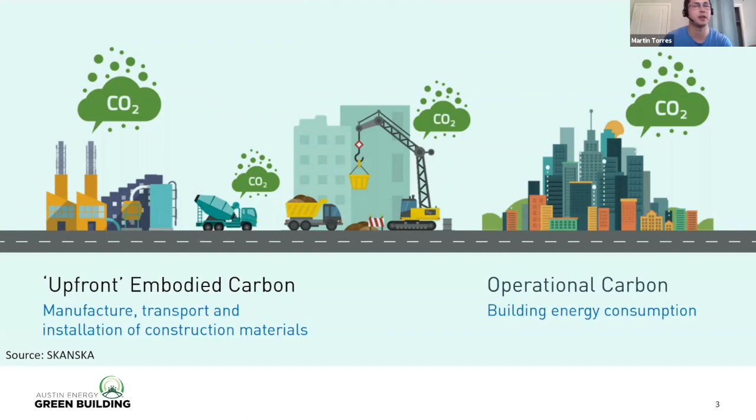I'm sure a lot of people here have seen this graphic, but very quickly, embodied carbon is the upfront carbon that's associated with building materials, as opposed to operational carbon that you see over the whole building lifespan, which could be 60 years, but it's all the energy use rather than the materials up front. And the important difference is the upfront emissions all happen before the door opens, and the operational emissions happen over the building's lifespan.

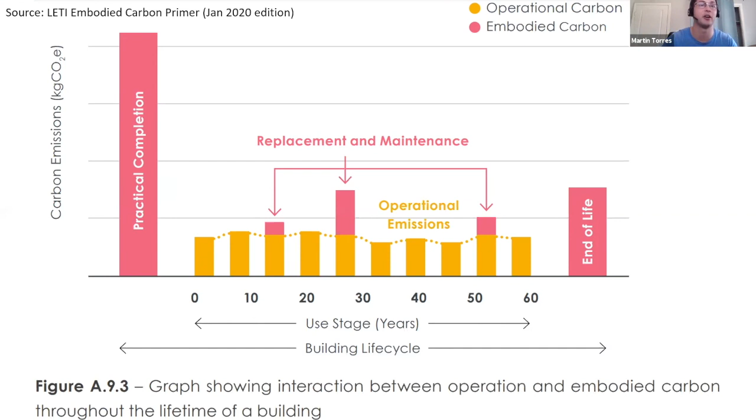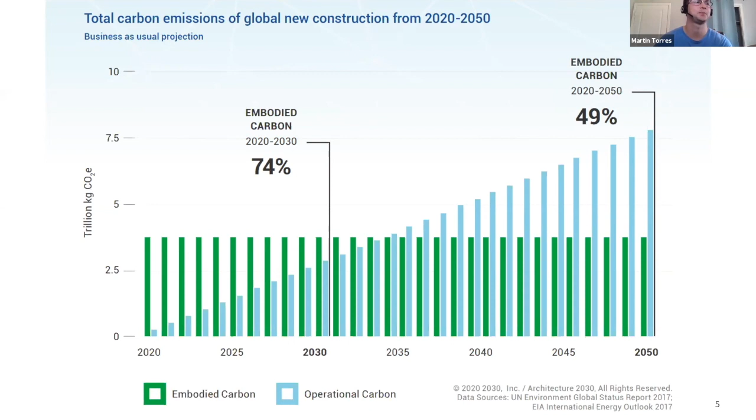And I'm not saying operational carbon isn't important. Improving those efficiencies is really vital. Refurbishing is really important, but this embodied carbon needs our attention too. I talk kind of ubiquitously about embodied carbon, but it's not just the carbon. Global warming potential, CO2 emissions, is really important. That's what's driving climate change, but there are other environmental impacts as well.

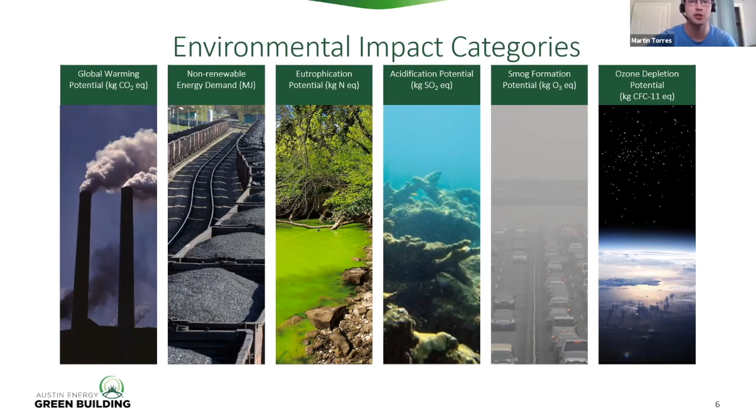So when I say embodied carbon, that is what I'm talking about, but there are all these other impacts happening as well: non-renewable energy demand, eutrophication potential, acidification potential, smog formation. Ozone depletion is sort of getting phased out. Buildings aren't shown to have a huge contribution to that, but it's still something that's tracked traditionally in LCAs and EPDs and whatnot.

So all components of a building are not created equal when it comes to embodied carbon. If I'm eating 40 cheeseburgers a week, the first step in my diet plan should not be to measure the oil and vinegar that I'm putting on my side salad. It should be cut out the cheeseburgers, right? So when it comes to embodied carbon reduction, let's focus on the big picture first. So much of it is coming from the structure, so a lot of the reduction strategies are focused on structural material, and that's the reason. We want to proportion our efforts to the outcome.

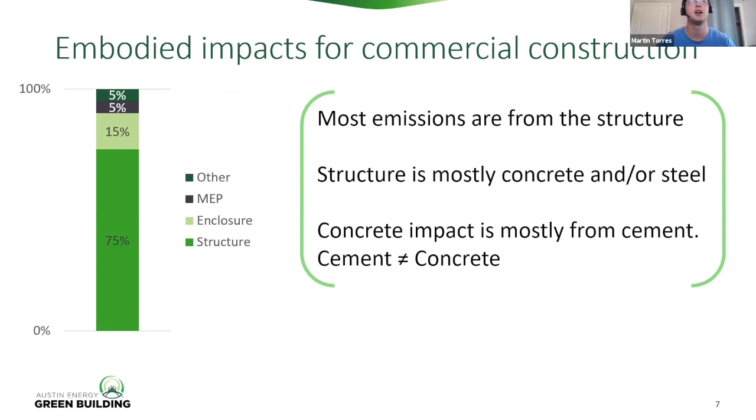And when we think about sort of the global importance of why embodied carbon, we're building a whole lot. And I mean, one of the best strategies to reduce embodied carbon is just using an existing building. The reason for that being you've already spent that carbon, it's already up in the atmosphere, so might as well take advantage of it.

But we're building a whole lot. And in the US, we might be able to reuse buildings, but with a lot of urbanization and especially in the global South, they're gonna have to build a lot. And what I wanna emphasize here is just this is a global problem and it's gonna require global solutions.

And so a lot of our reduction strategies, like let's share our best practices, let's create a community around this. That's where, and I'll talk about this later, something like the Carbon Leadership Forum steps in to share these best practices so we can have this community of understanding how we can respond. It's not just one person that wins the race. It's got to be all of us crossing the finish line.

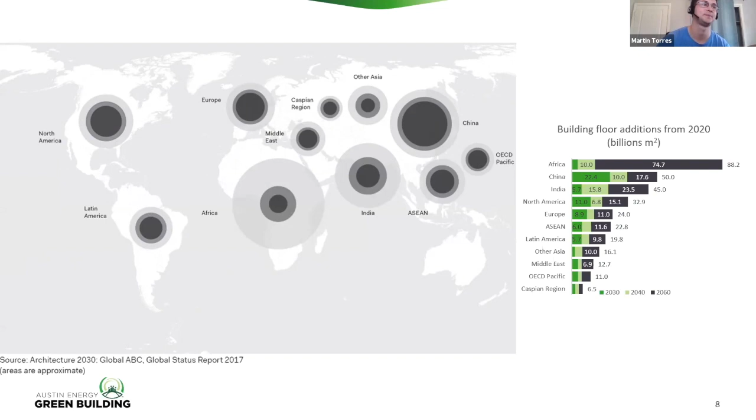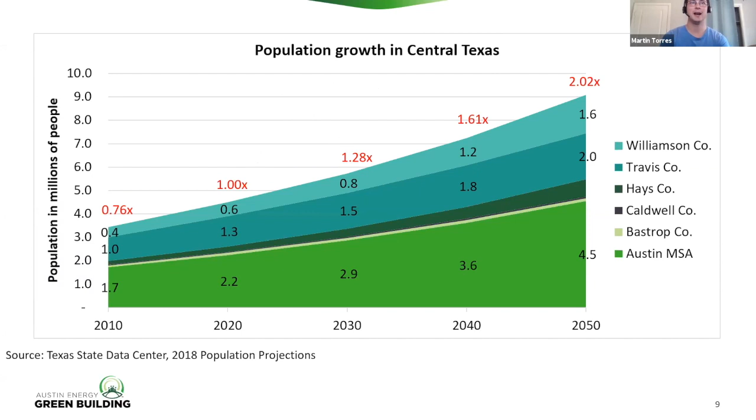And even here in Austin, I'm sure this comes as no surprise to anybody, but Austin and Central Texas is growing a whole lot. A lot of people are moving here, and that's going to take a lot of new construction. So this is a very pressing issue globally, but also locally.

So even outside the building industry, the way these materials are getting used is really widely impactful. So if we can make changes to update these supply chains and improve the process and improve tracking information, it's going to have implications beyond just the building industry, which I think is really important to understand.

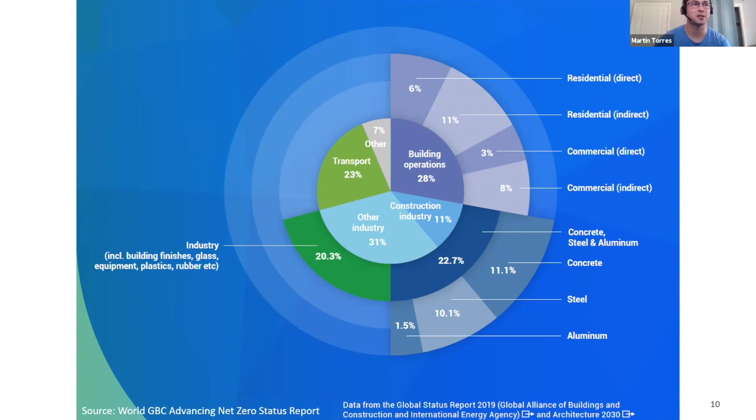But there are 1.5 million issues that we could be dealing with. There are so many things happening in the building industry. So why embodied carbon? I want to offer a thought framework that I find really valuable. And that's that the most pressing problems are big, neglected, and solvable. It needs to be big because otherwise there's less to be gained by solving the problem.

It's important that it's neglected because with more people addressing a problem, you start to get diminishing returns, and embodied carbon is certainly a neglected problem. And it needs to be solvable, because if it's not solvable, then what the hell are we doing? We're wasting our time. An example of something that wouldn't be solvable is aging. Aging presents a lot of health concerns, but it's a really difficult problem to solve. Whether we should put resources to that is a whole other conversation. So there's an overview of embodied carbon, why it's important.

So now I'm going to dig a little bit into biogenic carbon. Biogenic carbon is carbon derived from or contained in biomass, being material of biological origin. So generally what this refers to is wood, timber, mass timber, CLT. And it's important that we talk about wood because it's made up a lot of residential construction for a long time, but there's also an increasing popularity of mass timber products like CLT.

And it's a really appealing material for carbon reduction, but it's not a silver bullet. And that's part of what I want to dig into. It's really important to understand all these complexities of wood, what our current knowledge gaps are, what steps we can do right now, and what we need to keep in mind as we move forward.

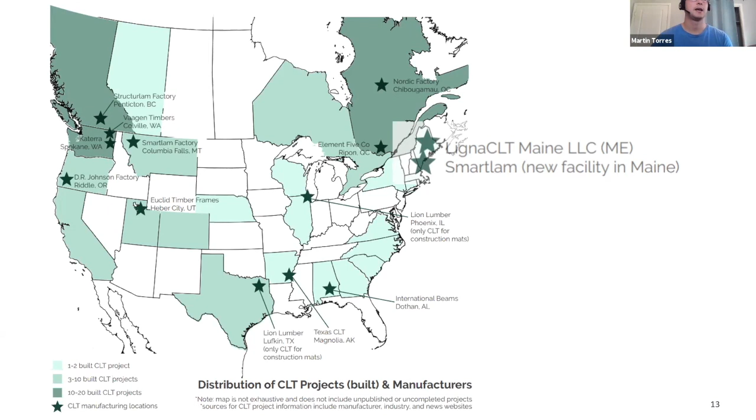So in a forest, we're all familiar with the process of a tree basically breathing for us. It takes in the CO2. But what I want to highlight here is that you can't think about a forest as just a collection of individual trees. You need to treat the forest as a mass in and of itself, because the forest's ability to store carbon is greater than just a single tree.

And the reason for that is a lot of the storing capacity happens in the soil, below ground, in the roots. And that's because it's really ecologically diverse. There's a lot going on. And so when it comes to sustainable forestry practices, this is one of the big reasons it's so important: if you're not facilitating this ecologically diverse forest, then it reduces its ability to store the carbon. So if we're just wiping out a whole bunch of trees without replenishing it and understanding the importance of that ecosystem, it can actually be really damaging.

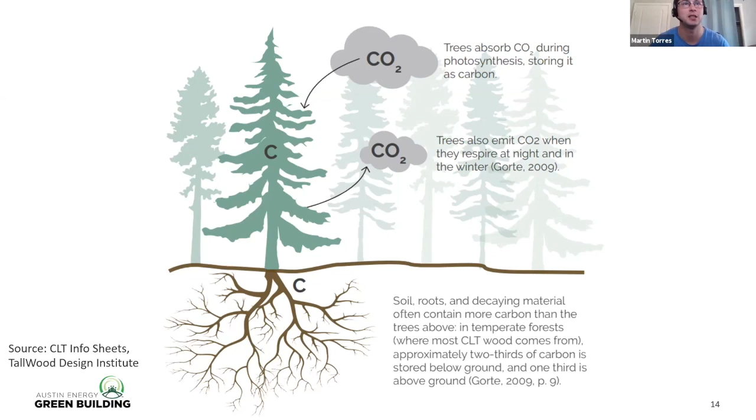And there's a bad way to get in there and get the timber products. And so it's not just as simple as I'm storing wood in my building and that's saving the world. If you're getting it from a bad source, then it can actually be harmful. And I think what that highlights is the importance of afforestation, building or growing new forests, and making sure they're done in a sustainable way.

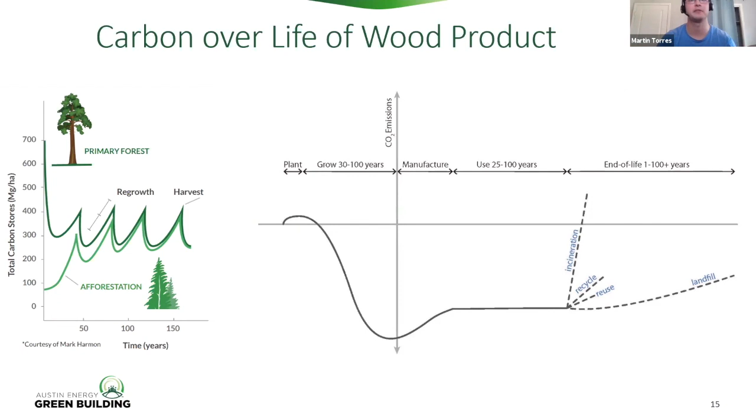And when we see the carbon over the life of the wood product, we plant it, it starts storing carbon, so it goes negative, but then when it's manufactured, it starts going up. Again, this is really oversimplified, but that's generally how this process works. Now, if we move that into the context of an LCA, then we think about it in different modules. So there's module A, which is manufacturing and processing, B, which is maintenance and reuse, C, which is end of life, and D, which is outside of the building system, so looking at recycling and reuse.

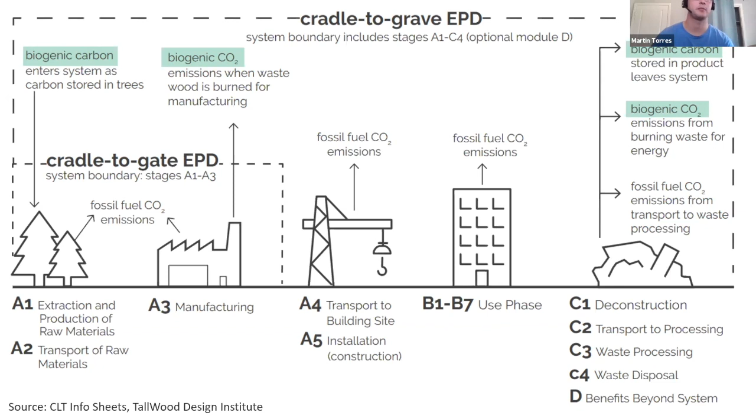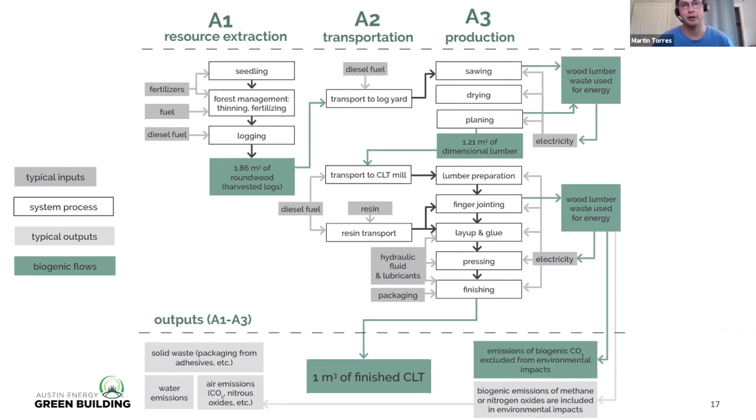And so to understand them, you really need to think about what's actually happening with the CO2. Where does it start? How long is it stored? When does it get sucked up by the forest? And so it actually uses time-dependent characterization factors that are basically used as multipliers for the biogenic carbon that you'd achieve in a more simple approach.

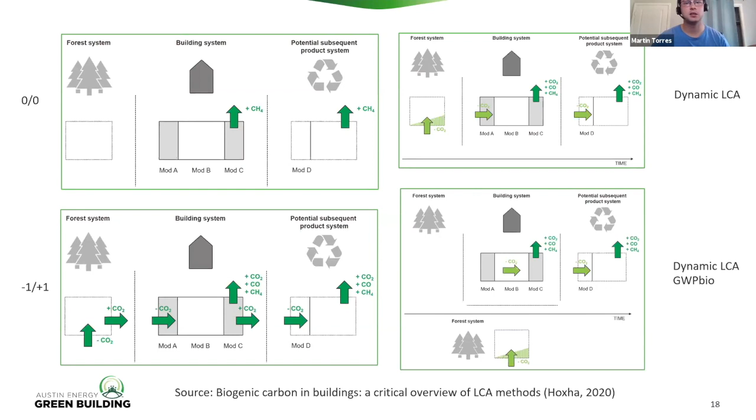And so looking at how these different methods compare, this is from a paper published, I think, last year. And so just looking at the massive differences between the 0, -1 + 1 compared to the dynamic approach. And the dynamic approach is really where the industry is heading. That's considered by academics to be a lot more robust and a lot better accounting of what's actually happening with the CO2. But you can see these huge differences. And so when we're doing LCAs right now, and we're generally using these first two approaches, I think what this does is it just highlights how much of the picture we're missing.

And the logic behind the huge differences is mainly due to that time parameter that's being used and the influence of wood residues from wood processing. Like, how are we dealing with all this waste? But needless to say, there are really big differences and not everybody necessarily agrees.

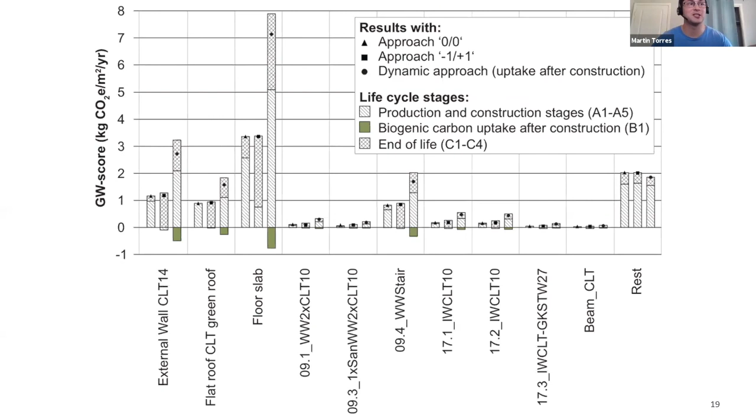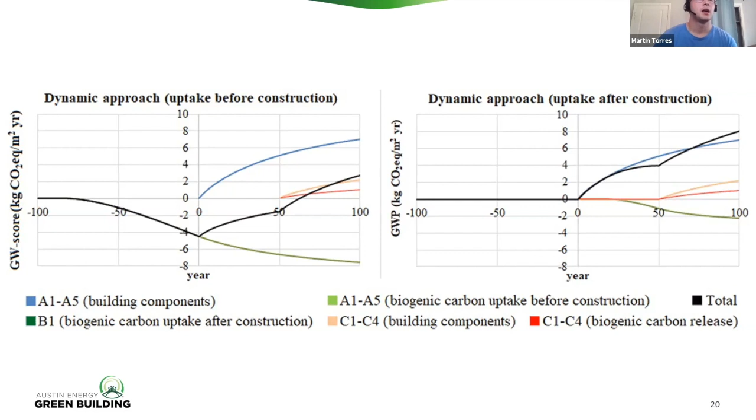Now, when it comes to these dynamic approaches, they're not currently available in LCA tools like Athena or Tally, but there is an Excel tool, and I'll drop a link in the chat at the end of the presentation. But the World Wildlife Organization has this Excel sheet where you can put in a lot of these different parameters, play around with it, and give a more robust understanding of what's happening with the wood. It's not perfect, but it's definitely a step in the right direction, and it's definitely where a lot of academics see this going.

So let's take it back to the real world, because when we're doing LCAs, you're using Athena or Tally or maybe OneClick. But even within these softwares, a lot of different assumptions are being made. And the main thing I want to highlight is, because what it comes down to is how much carbon is being stored. How much are we keeping onto? Where can we get that negative value? And if you look at Athena, we're getting 70% of the original CLT is permanently stored in a landfill. So that means we're sucking up that 70% of the carbon.

For Tally, it's like 32% of the original CLT. So it's a huge difference. And both of these are acceptable softwares. Both of these are fine. They're just making different assumptions for how much is going to a landfill, how much of it is anaerobic versus aerobic, what's happening with the decay.

And not to say that either is right or wrong, but it's different, and it shows just how much variability there is in this whole process.

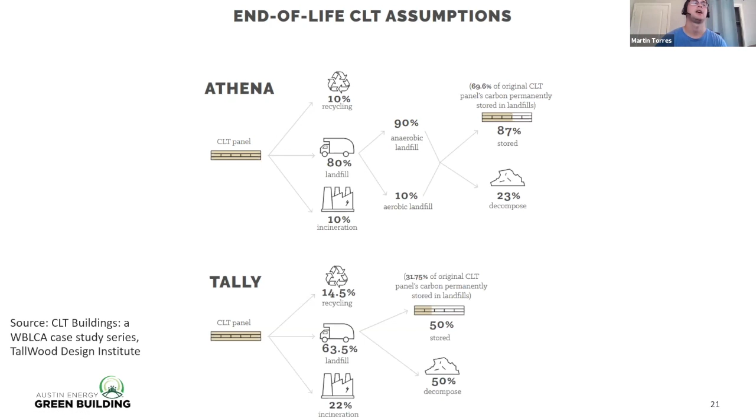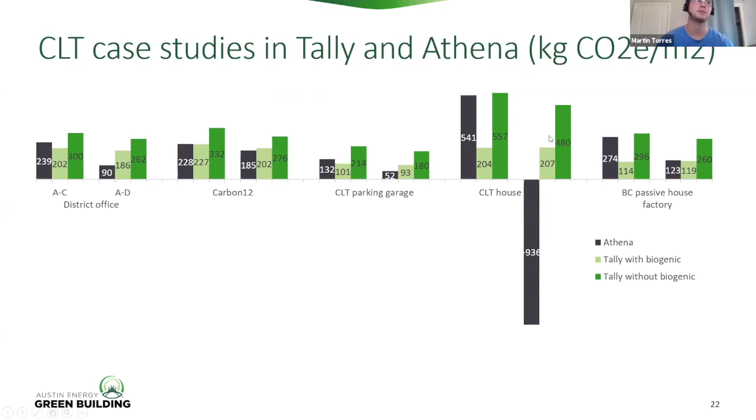But there are huge differences. They're not to say any of these is right or wrong, but nobody's really agreeing. And so I just want to highlight how important these assumptions are and understanding how much there is to know. So elaborating, I guess, on some of the knowledge gaps. This is presented as, what do we need to learn, and what do we need to do to do a better job dealing with wood?

So we need more transparency of impacts of pesticides and fertilizers. They're sometimes included, but not always. And this is partially addressed by certifications like FSC and SFI, but there are a lot of chemicals that are still allowed. And this is where it ties into some of the other environmental impacts that I mentioned earlier, like eutrophication, acidification. What are these fertilizers doing? And the recommendation here, and this is going to be kind of a consistent message, is we need more transparency. We need more data. This can come through certifications like FSC if we lean on those, but it's important to understand where they need to grow.

And then linking complex carbon models to CLT and wood product use. So when I talk about where all these assumptions are coming from, the full context of the biogenic carbon storage is really difficult to fit into our design decision process. So current LCAs of CLT don't tell the whole story. And this can include biogeophysical factors like surface albedo, surface roughness, evapotranspiration, land use change, whether that's direct or indirect. And all of these are site specific, so it depends on where you're getting the wood. Because it varies so much, it matters where it's coming from.

And then also stored carbon content. We generally assume 50% of the wood tissue is stored carbon, but this is approximate. It can range between 46% to 55%. So there's a range there, and understanding what values are specific to this tree species, creating a robust reference database to use for EPDs rather than just tossing the 50% out there because it sounds pretty.

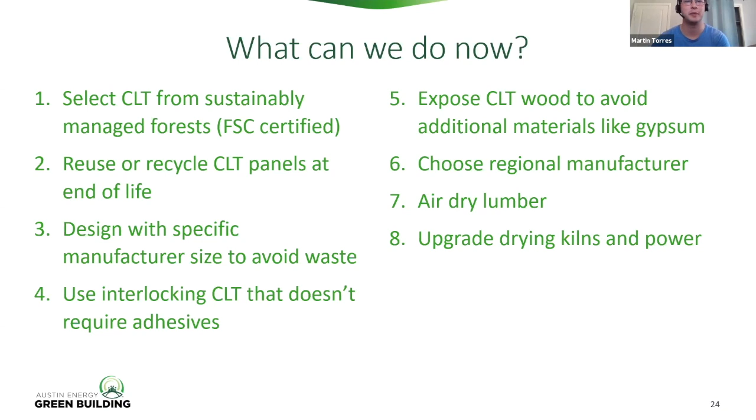Okay, that's timber. You're all timber experts now. But looking at embodied carbon reduction strategies more broadly, not just with timber. So the best thing you can do is just not build. We need to build less. So reuse buildings. But if you do have to build, then try to find an existing building that you can use, and reduce and replace, specify or design for deconstruction, use existing materials, use salvaged materials, reuse products.

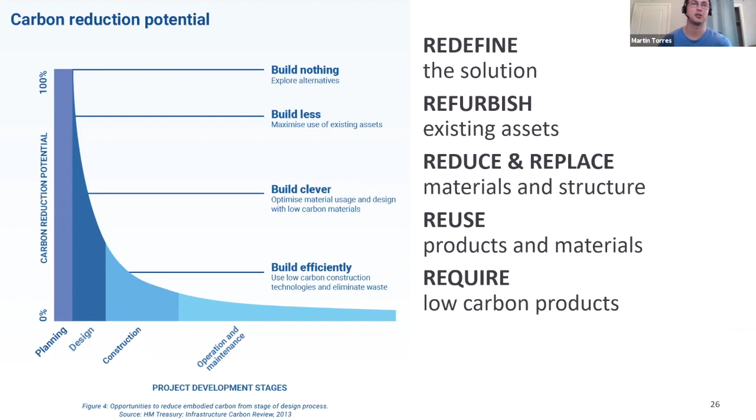And then the last step is requiring low carbon products. So if I am going to get concrete, then make sure it's low carbon concrete. But that's the last thing that you can do. I think prioritizing this early action can be really valuable. And when we do this, how we track this information is through EPDs and LCAs. And basically what you're doing, you're just getting material quantities, you're multiplying that by an impact, and then you have your building impact. It's that simple.

It's not quite that simple, because where are you getting the data? Where is it coming from? But this is basically the process that we need to go through. But we need more LCAs, we need more EPDs to make this more feasible. Because a lot of the time the impact numbers that we're using are industry averages, and it's a lot better if we can get more product specific and we can be more transparent about where it's coming from, because that can start to drive change of specific materials over time.

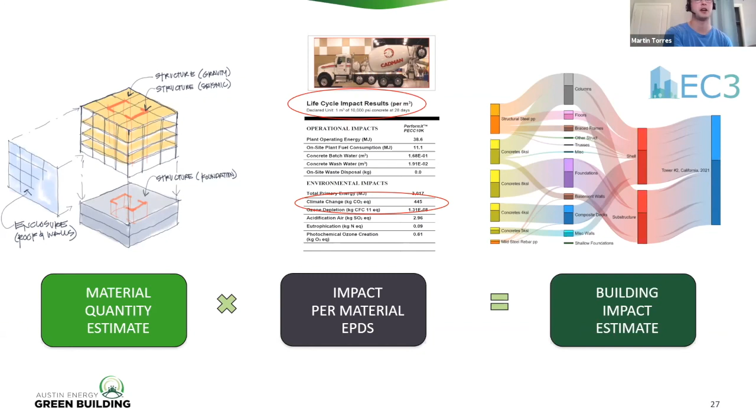So yeah, LCA overview, what are we doing? So you have your initial assessment. So what's the goal? What's the scope? How big is the building? What are we including: foundation, structure, enclosure. So define the building. How big is it? What are the end of life scenarios? Are we designing for deconstruction? Determine the environmental impacts. So figure out what LCA tool, figure out what assumptions you're making. How are you incorporating biogenic carbon if you are? Interpret your results. So do it early on, understand where your impacts are, reduce accordingly, and then prepare your reports.

So looking at specific materials, concrete, it's about cement. It's not fly ash replacement. It's about total cement. Fly ash is a great way to get to total cement, but it's about the total cement content. And you can do this in a variety of ways: longer cure times, optimize bay spans. I think that's a huge one. Optimizing material usage, making sure you're using as little material as you can. And then SCM replacement, using CO2 injection like CarbonCure, performance-based requirements, so you're not getting strengths that are way higher than you need them to be. And then also using Portland limestone cement. This is available in Austin; there's a producer that has Portland limestone cement.

Steel, you use steel from an electric arc furnace rather than a basic oxygen furnace, and that really comes down to the type that you specify. If you have HSSs, those are usually going to come from a basic oxygen furnace. So look at wide flange, look at recycled steel. Use braced frames instead of moment frames. That's usually, I think, something like 12% less material. Use joists and truss members instead of rolled shapes. Size members more precisely. Use higher grade steel. As steel gets stronger, the impact doesn't really go up, so if you use stronger steel, you can use less material. And then design for deconstruction. That's something I want to keep emphasizing, making sure that your building has a second life at the end of its life is really good.

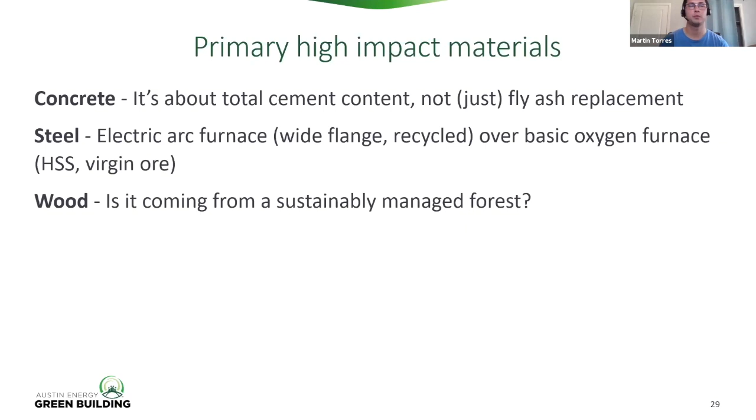Wood, we talked about this a lot, but reclaimed wood, local manufacturer, make sure it's FSC certified. And some secondary high impact materials. Insulation, stay away from high intensity HFC blowing agents. Use carbon sequestering insulation like wood, straw, clay, hemp, cork, wool. Avoid EPS, XPS, polyiso, structurally insulated panel systems with foam insulation, and spray foam. So leaning on those more natural materials is usually good. Gypsum, use lightweight gypsum, use thin gypsum, specify fewer grades, make it easier to recycle.

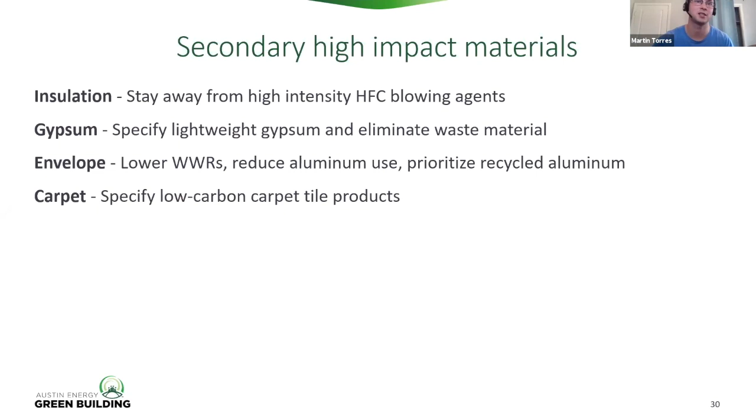For envelope, generally speaking, reduce aluminum and glass use. When it comes to the envelope, those are pretty high impact materials. And for carpets, there are low carbon carpet tiles. But like I said earlier, don't get too into the weeds of measuring the oil and vinegar on your side salad before addressing the 40 hamburgers you're eating, and that's really from the structure.

So, Carbon Leadership Forum policy efforts. Carbon Leadership Forum is an organization that I've been involved with for a couple of years now, and it's international. It's kind of an industry-academic partnership just aimed at, let's decarbonize the built environment. Let's talk about embodied carbon.

And the way it does this is it has four pillars. They do research; there's an academic side of it. They provide resources for designers. There's a network, and that happens locally. We have a hub here in Austin. But then there's also an online community, kind of called the Google search of embodied carbon, where you can start conversations, make posts, and interact with people all around the world.

And then different initiatives, and some of these are policy initiatives. So there's SE 2050. This is like Architecture 2030 for structural engineers. It's really meant to educate structural engineers about tracking embodied carbon, tracking quantities, and reporting that. And it also hosts a database of this information.

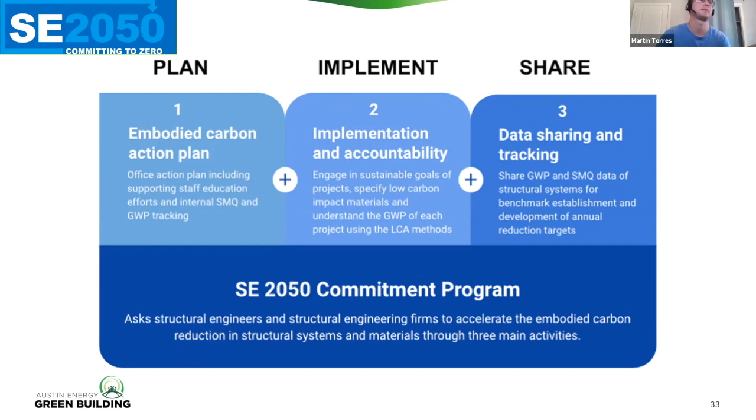To take it back to the LCA conversation, because there are so many different assumptions being made between LCAs, it's a useful tool for project-specific reduction. It's not necessarily a useful tool for comparing values between projects, to say unanimously your concrete building should be 500 kilograms of CO2 per square meter. But what SE 2050 is trying to do is collect material data and impact data to do a better job of informing these benchmarks, because we have a really hard time establishing benchmarks as it stands. And so that's SE 2050.

There's also EC3, which is the Embodied Carbon Construction Calculator. This is basically an EPD database online. You can connect it to your Revit model. You can connect it to Tally. You can upload material quantities, and it hosts industry average EPDs, but also product-specific EPDs. So it's something that can be leveraged to understand material selection in your region.

So I can search, well, not in Texas, but if Texas had concrete EPDs, I would be able to search what 5 KSI concrete looks like. What can I reasonably expect the GWP to look like? And then I can look at what's available and use that information to inform my procurement. So it's a really valuable tool that could be leveraged.

Okay, so in our past events we've basically been holding educational events. There was an EC3 demonstration. We talk about low carbon material reduction for concrete, steel, and timber. We've been involved with the climate equity plan. We're holding an LCA workshop at the end of the month. We're hoping to do an SE 2050 overview where we want to play a big part in outreach, coordination, and mentorship, making sure big and small firms are all involved in embodied carbon reduction. We want to address embodied carbon on a local level.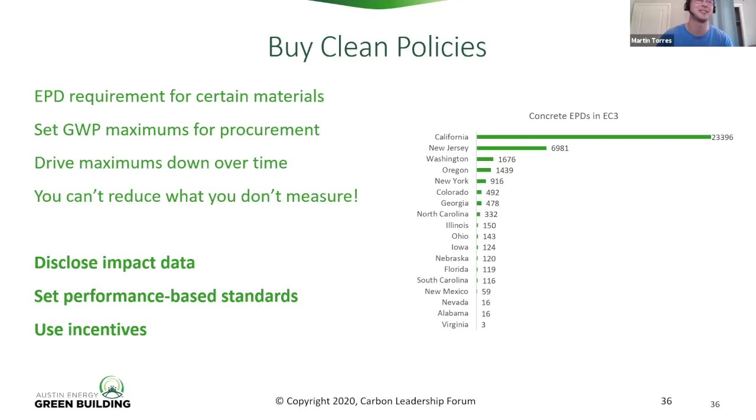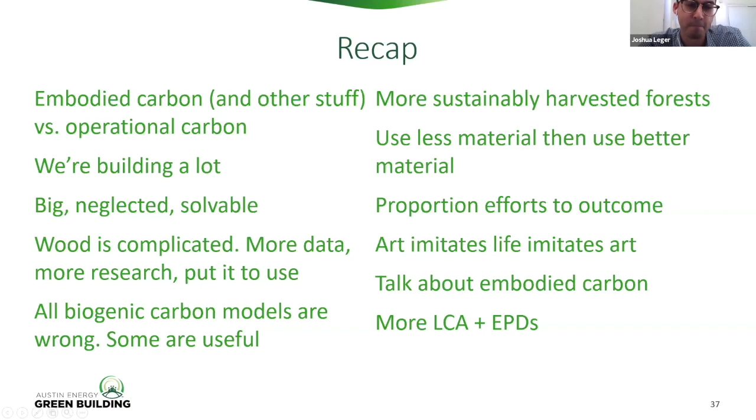And in framing this to the 2030 commitment, I think it's important to start to record and model our embodied energy, just so we know where we're at, so that we can set a goal on where we're going. Similar to the EPD data, we need to have that data to know exactly where we are, so we can start to set those goals.